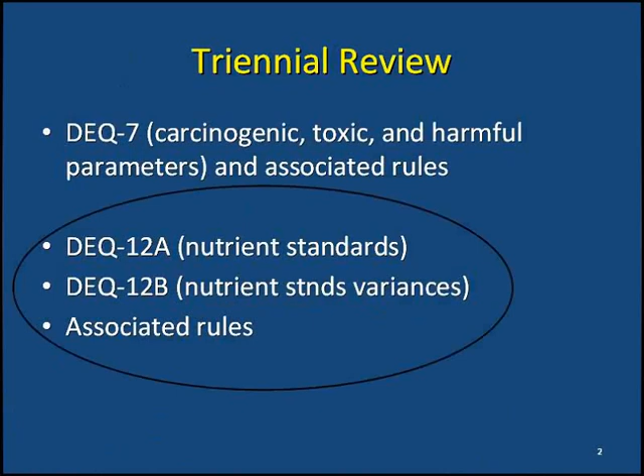Now within this group, there are actually two circulars, as I pointed out, A, which pertains to the standards, and B. Although we considered both of them initially for this triennial review, there were no new numeric nutrient standards developed at this particular point in time, and so there was nothing to address in Circular DEQ 12A. Therefore, the entire presentation that you're about to see will focus on Department Circular DEQ 12B, which pertains, again, only to the process by which a variance is granted from the nutrient standards.

So as I pointed out, under the Clean Water Act, we review our circulars every 3 years. That's also true under the Montana Water Quality Act. And specifically for nutrients, we have statute that requires us to review the specific groups that are in DEQ 12B that may receive a variance. There are three general categories of variance recipients described in statute. That would be the group of discharges whose discharge is greater than or equal to 1 million gallons per day, the group that discharges less than 1 million gallons per day, and people or communities that have lagoons for treatment systems.

Currently, the greater than 1 MGD group has a requirement that if they can't meet the numeric nutrient standards, those found in Circular DEQ 12A, then they need to treat their wastewater to at least 10 milligrams total nitrogen per liter and 1 milligram total phosphorus per liter. If they're in the less than 1 MGD group, those numbers become 15 milligrams TN and 2 milligrams TP. And if they're using a lagoon, then they are expected and required to maintain their current performance.

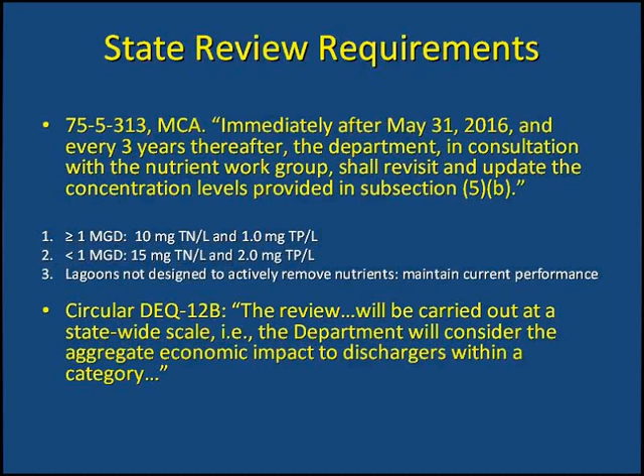So beyond that, Circular DEQ 12B directs us how to carry out the triennial review for each of these three groups. They'll be looked at on a statewide scale, and we will consider the aggregate economic impact to dischargers within each category. And much of what we'll be seeing in this presentation pertains to the detailed analysis of each of these three groups. As I mentioned, in 2014, circulars A and B were adopted.

However, in 2015, about a year later, the United States Environmental Protection Agency updated its rules regarding variances. These changes made at the federal level had a significant effect on DEQ's triennial review, which we would have carried out anyway. The three most important components of the federal changes that affect our triennial review are the requirement now to identify a highest attainable condition, or HAC, which I'll be discussing later, the amount of time it takes to achieve the HAC, and something called a pollutant minimization program. We'll be looking at all three of these as we go through this presentation.

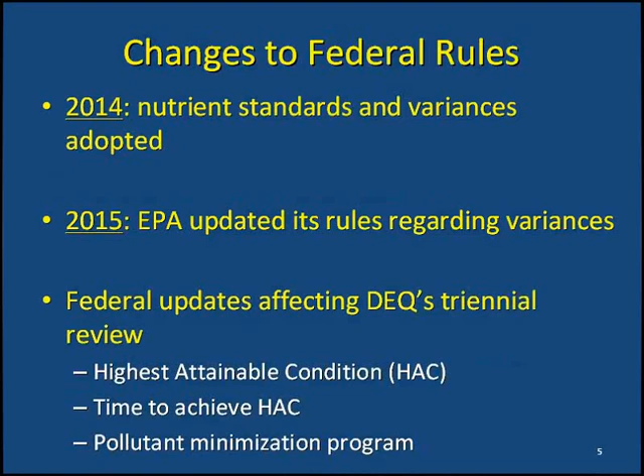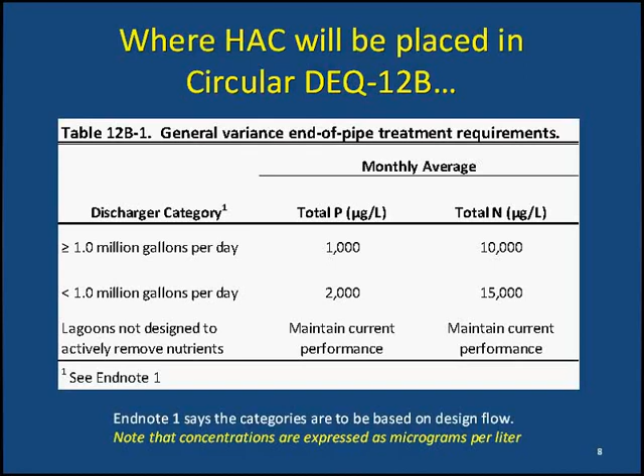So wastewater treatment cost estimates to identify HAC. How are these done? Well, we looked at each of the 3 categories individually, the greater than 1 MGD, less than 1 MGD, which, as I probably mentioned, are mechanical facilities. We looked at lagoons, and we coordinated these analyses and discussed them and the results with the department's advisory group on this topic, the Nutrient Work Group. We held 4 meetings between September of 2016 and March of 2017, and in and amongst those we had 5 technical subcommittee meetings in February and March as well to go into greater detail of some of these analyses.

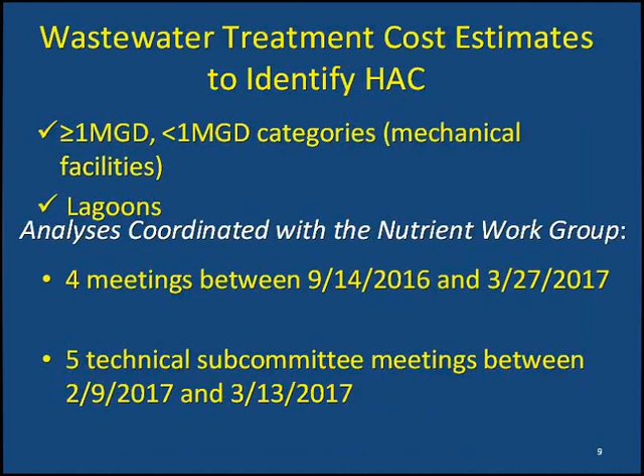The basic process by which we identified highest attainable condition was, for the greater than 1 MGD group, we first identified a range based primarily on cost to the group. How much would it cost the group of dischargers that need a variance to achieve different treatment levels? We then discussed those results with the Nutrient Work Group, received their input, and we also compared the output and the results to other biological nutrient removal facilities that have dual nutrient control and that are being operated around the country. For the less than 1 MGD group, we did the same thing, identified that range based on cost.

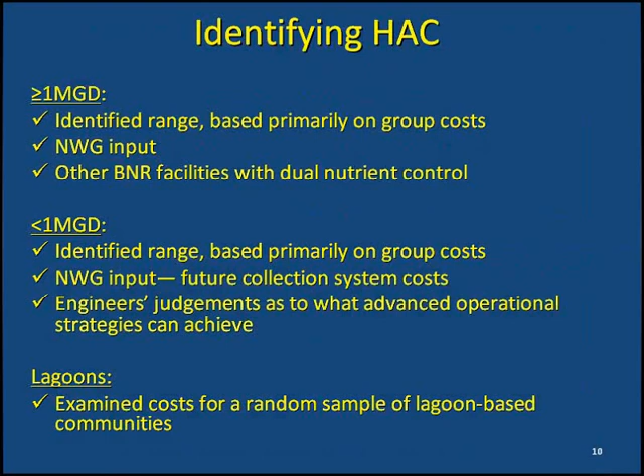We then also looked at a little bit further detail of the cost for future collection systems, and we also relied on engineers' judgments as to what advanced operational strategies, or plant optimization, which is another way to put that, can achieve. For lagoons, we examined the cost for a random sample of lagoon-based communities using a similar process but on a more limited basis than we did for the other 2 groups.

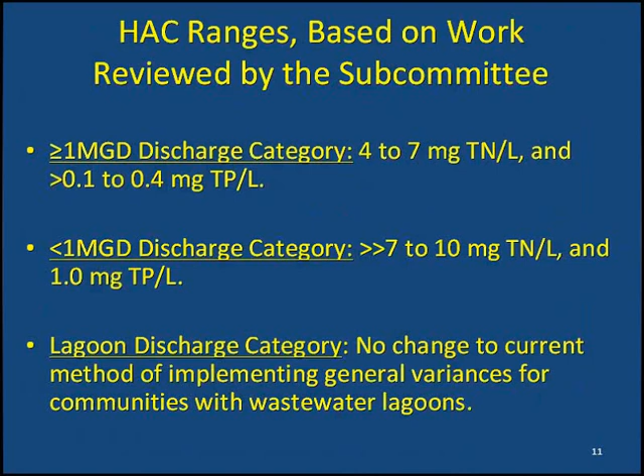So this is a summary of the ranges that were found based on cost analyses and some of the other materials that I just mentioned, and we'll look at the details of each of these going forward. For the greater than 1 MGD group, it was found that the highest attainable condition falls somewhere in the 4 to 7 milligrams total nitrogen per liter range, and the greater than 0.1 to 0.4 milligrams total phosphorus per liter range. For the less than 1 MGD group, it would be something significantly higher than 7 and up to possibly 10 milligrams total nitrogen per liter, and right around 1 milligram total phosphorus per liter. And for the lagoon discharge group, the analysis revealed that there should be no change to the current method of implementing the general variances.

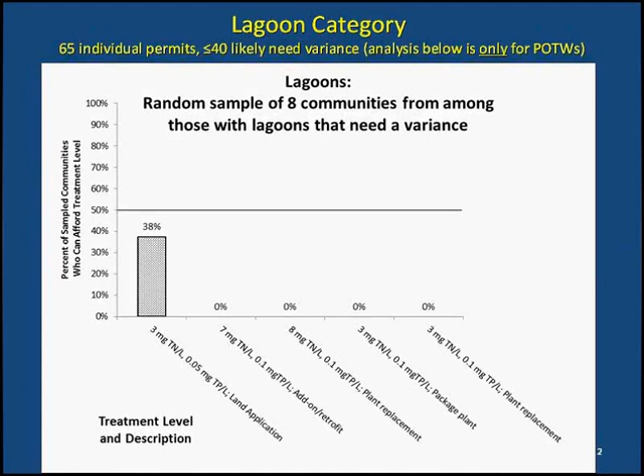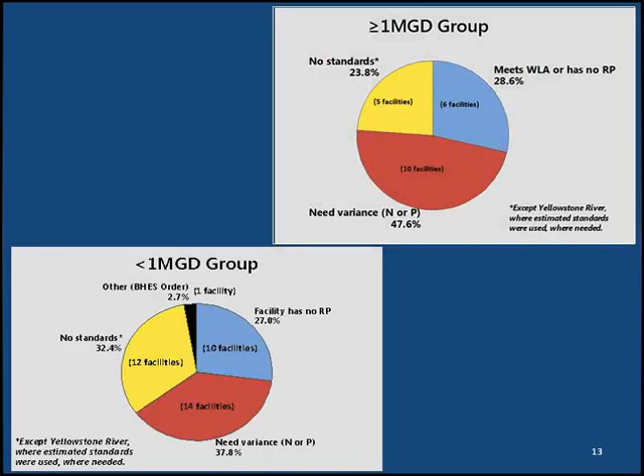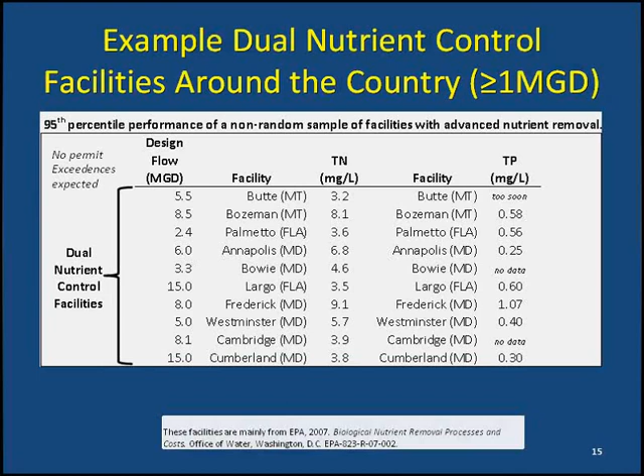Now, as I mentioned, we looked in further detail at the cost for collection systems, especially focusing on the less than 1 MGD group. We actually built into our cost estimates, the ones I was showing a moment before, what we figured would be a small and likely underestimated value for collection system cost upgrades.

But further analysis by one of our engineers suggested that the smaller communities, those that typically fall into the less than 1 MGD group here, are likely to carry much heavier burdens in terms of future collection system cost replacements, because there are fewer people in the community to spread the cost across when pipes in the street need to be replaced or relined or lift stations need to be upgraded, etc. And those can actually be a pretty substantial part of their community median household income.

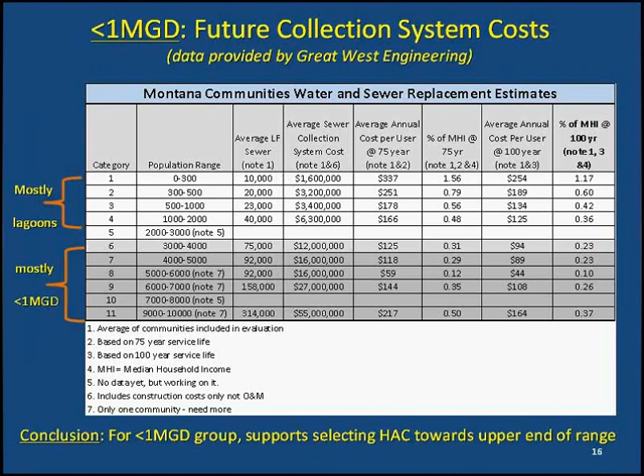So what these data indicated to us was that for the less than 1 MGD group, we should select the highest attainable condition that leans towards the upper end of the range, because these folks are likely to be looking at significant additional costs that we have not rolled into our estimates when it comes time to upgrade their collection systems.

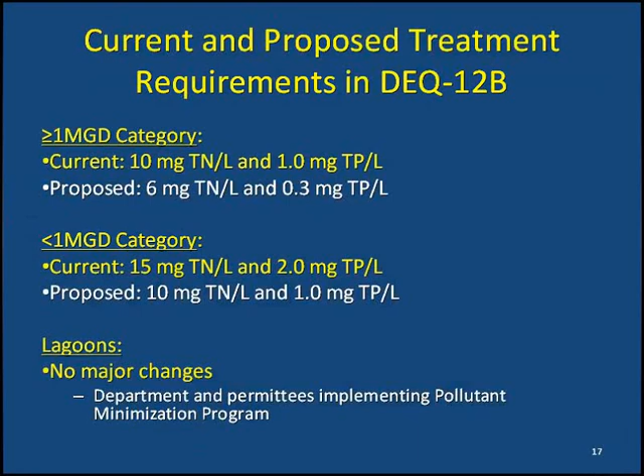And for lagoons, because the costs were essentially unachievable for almost all the technologies we looked at, there will be no changes in the way we're permitting lagoon variances, other than to implement a pollutant minimization program, which I'll talk about shortly.

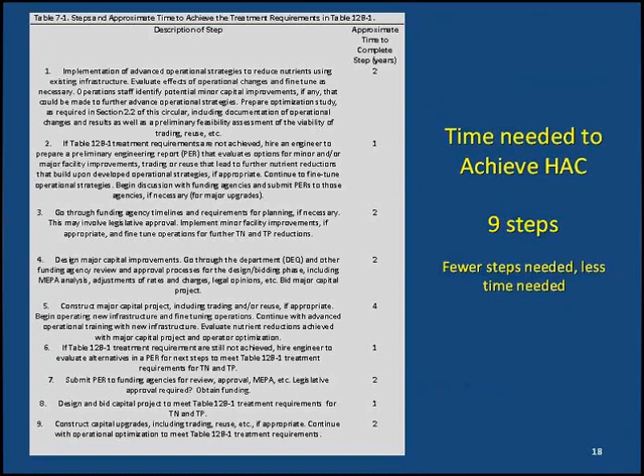Now, what about the time it takes to achieve the highest attainable condition? Is this expected to occur immediately or within a permit cycle? No, that's not necessarily the case. We've identified, along with our engineers, about 9 steps that it would take to go from current conditions to achieving the HAC. And what these are is they're a combination of advanced operational strategies or optimizations combined with actual facility upgrades. And if it takes fewer steps than these 9 for a particular facility to get to the HAC, then less time would be required to do so.

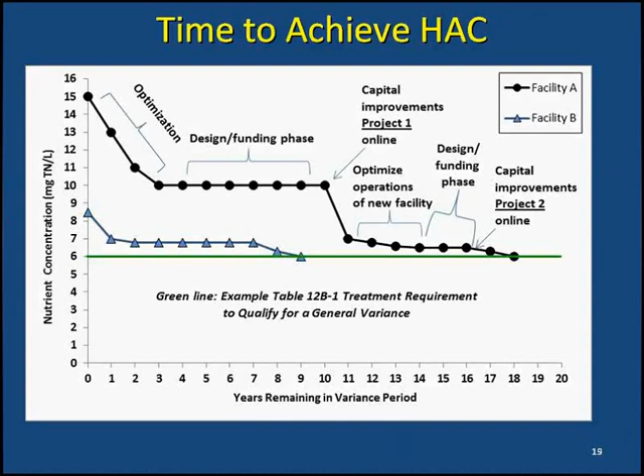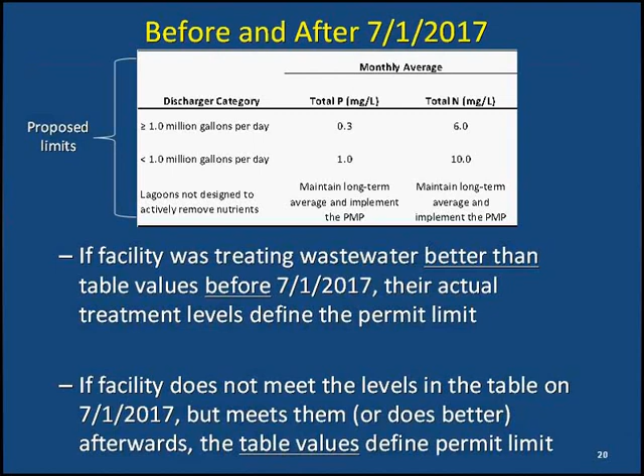Optimization was a requirement in order to receive a general variance since the initiation of our rules back in 2014. So those always had to be completed. Going forward, they'll be required to be incorporated into the facility's operation and maintenance manual.

And earlier I mentioned that we have a new requirement under the federal law called a pollution minimization program. Those are to be required to be put in place when a facility actually achieves the treatment requirements in Table 12B1 or the HAC. The point being is that if it takes some years for a facility to achieve the highest attainable condition, they don't need to do the PMP right away. They do the PMP at the time that they actually achieve the highest attainable condition.

And as I mentioned, the time to achieve the treatment requirements will vary from facility to facility. One nutrient may be achieved first, in which case the PMP will be required for it first. So what is a PMP exactly? It's defined as a structured set of activities to improve processes and pollutant controls that will prevent and reduce pollutant loading. Some examples of this would be that a facility may want to reduce or try to reduce pollutants before they ever enter the wastewater treatment system.

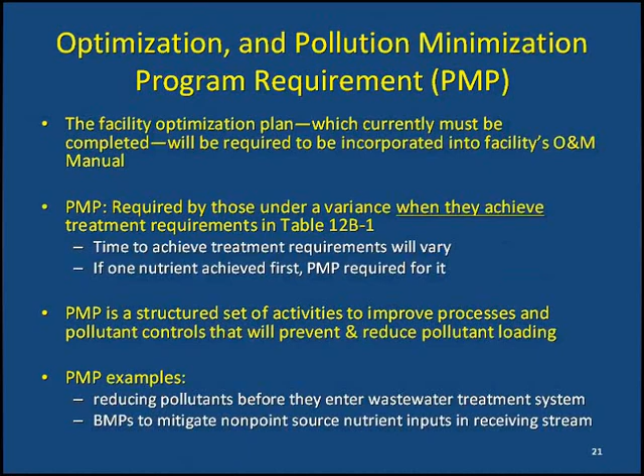This is commonly done in larger cities. Or, for example, it could be the case that a point source could work with an upstream non-point source, a rancher or farmer, to mitigate some pollution sources in that regard, so that the water quality in the receiving stream is better. Those BMPs that were implemented would also be considered a PMP.

Another change that we are recommending for this triennial review is a change in one of the aspects of the permitting process called the coefficient of variation. This number, which is used to calculate the permit, is essentially a measurement of how variable the effluent quality is. If effluent quality is very consistent and is almost always the same, it'll have a very low CV. If it's highly variable and changes a lot from day to day, then it will tend to have a high CV. And right now, the way permits are developed is the CV is based on past results or past data.

But what is known is that the CVs are likely to go up when lower nutrient effluent concentrations are achieved, because that's just the basic nature of how it works with nutrients, because they're harder to continually maintain at lower concentrations. And this could lead to compliance problems. So we're proposing a fixed CV of 0.6, which is commonly used in permitting, especially for small data sets, which is the case here, as being more appropriate for when nutrient effluent concentrations are low. This CV value should be reviewed in the future.

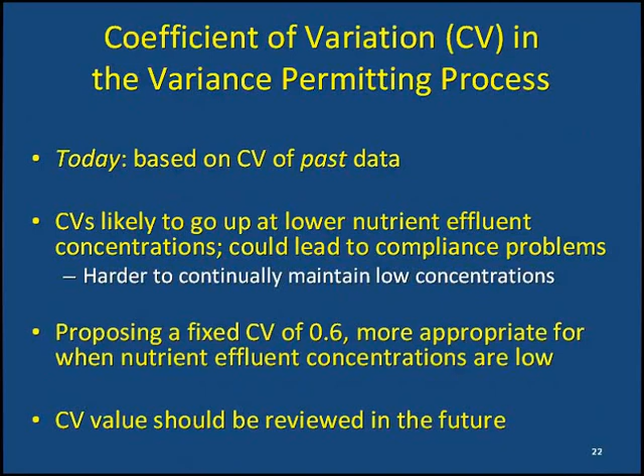In 2014, along with the rules and the circular DEQ 12A and B, DEQ also published a guidance document which was intended to help the department work into the further details of very technical aspects of implementing the rules. But it's not actually part of the rules. But we will be updating this document nonetheless. Some important changes or lack of changes that I'd like to point out is that we are not going to be changing the definition for the limits of technology that are currently in this guidance document. They will remain as 4 milligrams TN per liter and 0.07 milligrams TP per liter.

We will be deleting section 2, the nutrient reduction steps, and replacing them with a description of the process for identifying highest attainable condition, along with some of our lessons learned as we've developed the highest attainable conditions. And finally, we have supplemented section 3 with additional guidance on individual variances, as we anticipate that more facilities may be looking to pursue individual variances going forward, and so we've provided some additional guidance on those in this section.

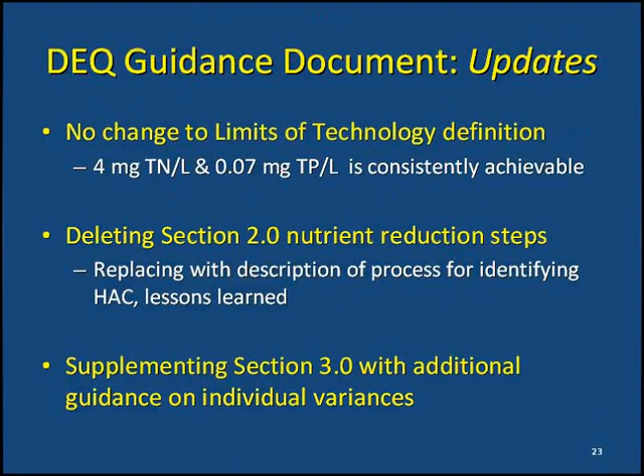Finally, I'd like to present to you the general timeline for the rulemaking. On April 14th, last week, the Montana Administrative Record notice was published that the rulemaking had begun, and so that essentially started the rulemaking process for this triennial review. Out on our website, at the same location where you found this video, you can find the track changes version of Circular DEQ 12B. You can also find a technical report on the triennial review.

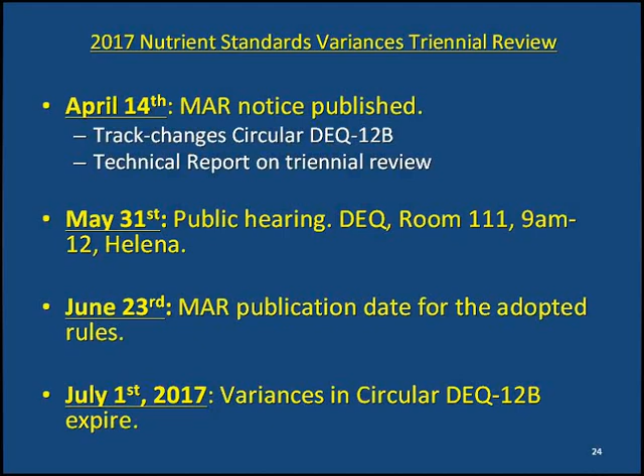On May 31st, here in Helena, at the DEQ in room 111, we're going to have a public meeting from 9 to 12 on the rules and changes. Then on June 23rd is the publication date for the adopted rules that we will have updated. And all that should be completed before Circular DEQ 12B expires on July 1st, 2017.